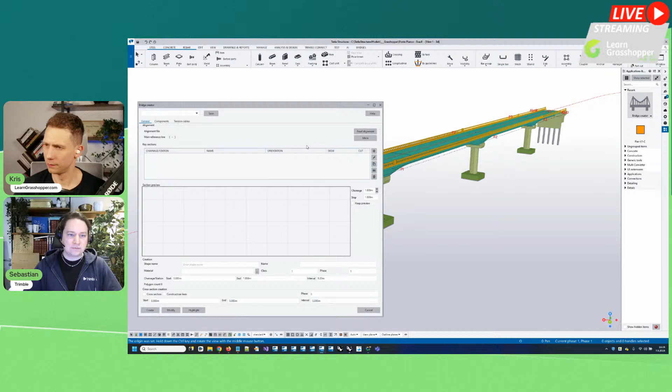Perfect. Yeah, thanks, Kris. So this is the case study we're going to do today. The bridge that you see on screen here has been created by Gabriel. It's based on a real location, on a point cloud scan, if I understood correctly. But the bridge is something that Gabriel then created using the Tekla Bridge Creator tool. So I'm just going to quickly pop up that tool on the screen in case you haven't seen it. This is not Grasshopper based. It's our own tool for creating bridges based on sections, and you can do quite complicated stuff with it. For example, this bridge was fully created with that tool.

And in this case, maybe it's not an overly complicated bridge. I don't want to say basic, but it's a normal bridge. It's straight and it's got some piers and so on. And a key point here, which Kris already mentioned, is that for Greg's part, when he starts with his drawing production, it doesn't matter how this bridge was created. In this case it was Bridge Creator, but you could have modeled it manually in Tekla, or maybe used IFC conversion to get in some reference models and build it that way. But of course, since this is a Grasshopper webinar, we want to show you how you can do something like this using Grasshopper. So that's the plan for the next section.

And just a quick question. As far as I know, Bridge Creator is available in Tekla already as a built-in tool in Tekla 2024. Am I right? Yeah, it should be included, and Gabriel might correct me if I'm wrong, but it should be included in the installation with the bridge role. Otherwise, it's probably on Tekla Warehouse.

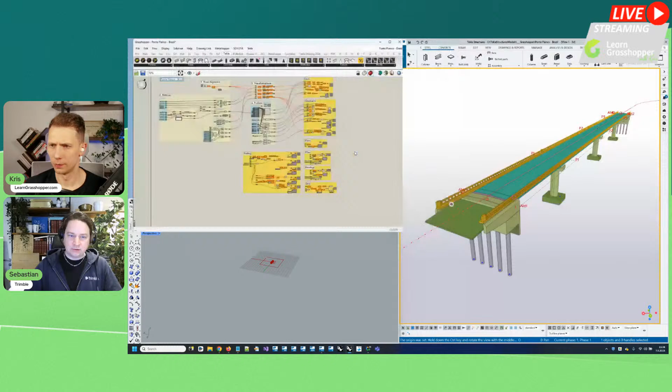But yeah, starting in Grasshopper, let me just see if I can get these windows a bit bigger. So this is the definition that will ultimately generate our bridge. And we have a couple of key parts here. What we want to start with is to get the road alignment. This could be a curve we have in Rhino. It could come from a CAD file. Maybe it could come from an Excel file with coordinates that we then just interpolate through. In this case, we have a polyline in Tekla Structures, so we can just use this one here as our reference line. And then let's see what we got.

So just for someone who is seeing Grasshopper and Rhino for the first time, Rhino works a little bit like AutoCAD, so you can import DWG files as a normal import. So if you have your road line in DWG format, that's perfect, but as Sebastian mentioned, you can also use X, Y, and Z coordinates. And for Grasshopper, you have some plugins to import LandXML files, so it's also possible to import LandXML files. Yeah, that's a good point.

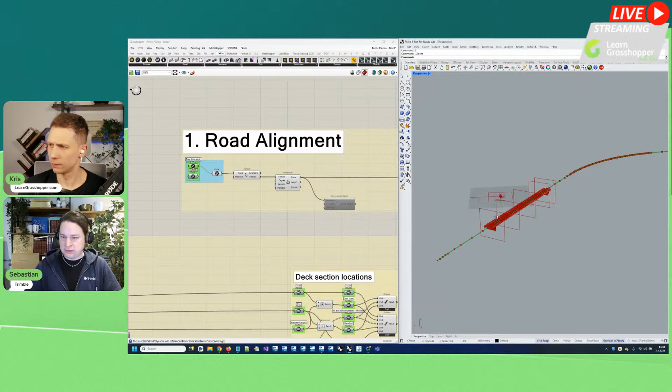In this case, however, we did get that polyline from Tekla Structures, and we see it here as the green curve. And we also get a preview of the bridge that the script generates. It doesn't yet create anything in Tekla Structures because I haven't activated those components. But anyway, once we have the road alignment, the next task is to define our stations, the interesting locations along the alignment, like where the bridge starts and where it ends, and so on, which we do here using just number sliders.

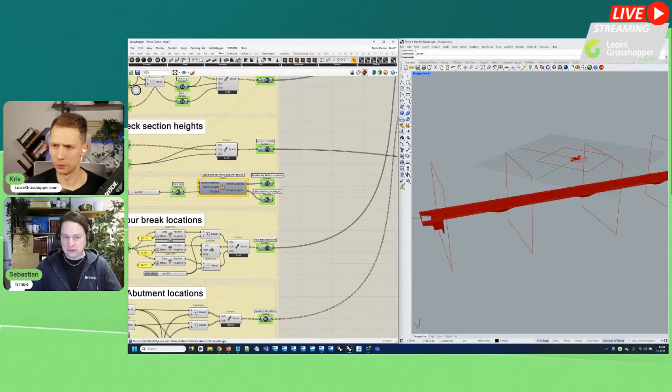They could as well come from somewhere else, of course, from your Excel sheets, for example. So we have the start, the end location, the location of the piers, the length of the abutment, and so on, as well as some stations here for the different parts of the abutments. And from all this, we just compile some lists of numbers. At this stage, it's just like the location along any road line. Where do we want certain things to appear?

Sorry to interrupt. Just one question: is there any thumb rule about the millimeters? Because I see that you are defining everything in millimeters. Is that a golden rule that we have in the Tekla Grasshopper world? Yeah, millimeters or meters work for bridges.

I like to use millimeters just because it makes it easier with profiles and stuff when you want to get really exact. Of course, for your stations, maybe you would like to define them in meters, and that's fine. Then you just use meters as units in Rhino and preferably in Tekla as well. But even if you have different units in Tekla and Rhino, they will still get converted the right way. So if we had meters in Rhino and this defined in meters, we can still have our Tekla models in millimeters. But for consistency, I'm just using millimeters for everything here.

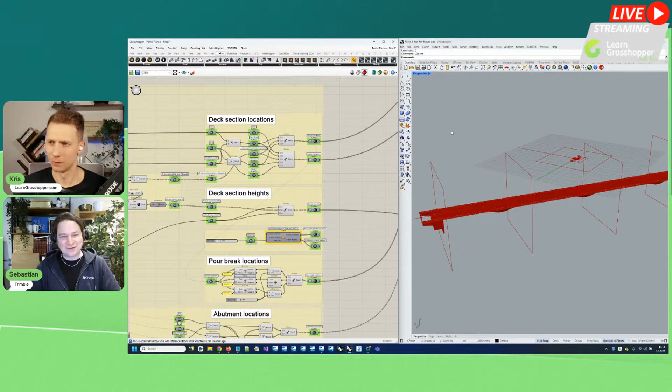And if you are based in North America, you can change that for inches and feet, right? Yeah, you can do inches and feet for stuff in Grasshopper. Then you just need to be aware that once you get to stuff like parametric Tekla profiles and certain types of offsets, right now they still need to be in millimeters from Grasshopper. And you'll quickly learn that if you use the wrong unit, everything gets scaled really interestingly. So you might need to do some custom scaling in Grasshopper before entering certain values, and that's something we're trying to think about workarounds for. But it's possible to use feet and inches as well.

Yeah, I think in Rhino 8 there are new components in Grasshopper to convert units. It's really simple to use. Yeah, this one, convert unit. So it's a source, and you can choose whatever kind of unit you have, and it's going to scale that. So maybe it can be helpful. Yeah, this would definitely be handy when you have something in inches and you need millimeters for Tekla. So that's a good tip.

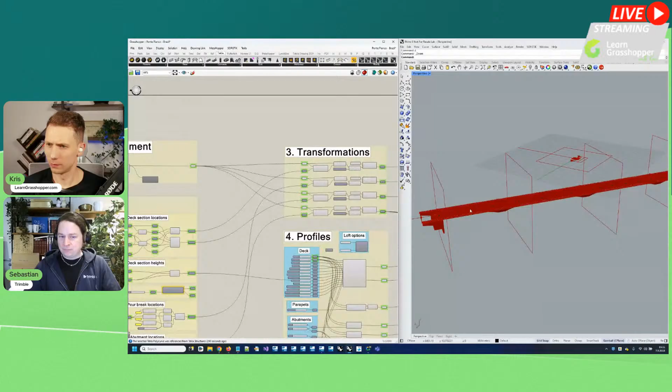So what we do then, because we have this list of numbers, we need to know where along the road line they appear, and for that we're doing these transformations. So it translates those numbers into actual frames along the road alignment. We have the start, some sections or frames for the abutments. Then we're adding some extra sections or frames at the support, because we want to be able to modify the depth of the profile at these frames.

And next, if we just continue the high level stuff, we will define a set of profiles. So this will be the profile of your bridge deck, but also the profiles for the different pieces of the abutment and so on. And they can be defined just here in the XY plane.

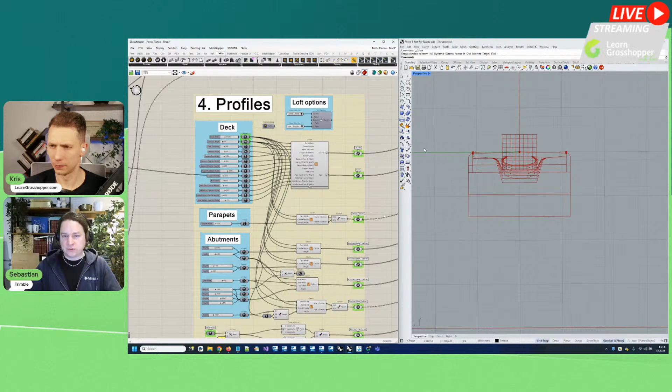Okay, but I think we have to explain a little bit more what we are seeing, because maybe for you it's easy to see the section, but I see lots of sections. So if you can just explain a little bit further what we are seeing on this plan. Yeah, I will go a bit more into detail about how it works in a minute. I think the point at this stage is just that we're defining in the XY plane all the different sections and profiles we want to use for the bridge. And I'll show them in a bit more detail in a moment.

But just the high level right now is that we have our sections, and we had all those frames along the road alignment. At this point, we haven't actually generated the bridge. This is what we have. And then we want to move those sections onto the alignment. So you see how we get them here for the deck, for example. And then we do a simple loft through everything, and we have something solid that we can start sending to Tekla Structures. And I'll show you that in a minute.

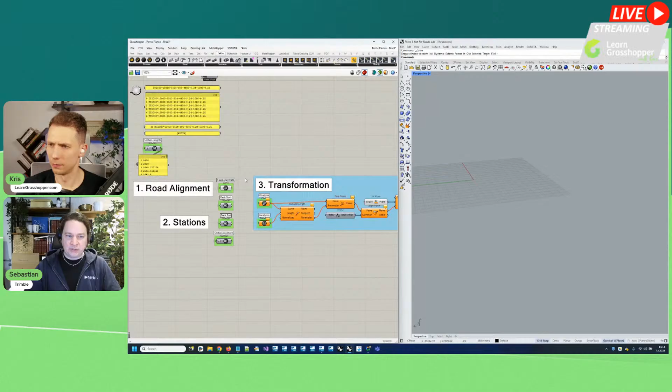But before that, let's take one example here for the deck to see how it works in a bit more detail. So going up here, we have again the road alignment.

That's the first step. In the second step, we were defining those stations, those numbers. So here we have the start mileage or chainage and the end. And then at the third stage, we had those transformations. So if we connect the start and end, you can see that here along the bridge deck, we will get the start of the deck where it should appear. And remember, this is just a preview underneath. So this is what we actually have at this point.

So until this stage, all these numbers can be also defined in the Excel spreadsheet. Like every bridge designer. Exactly. Yeah. So this doesn't need to come from within Grasshopper. You can link this to an Excel component, for example. And we can see the start frame there, and we have an end frame at the other end of the supposed deck.

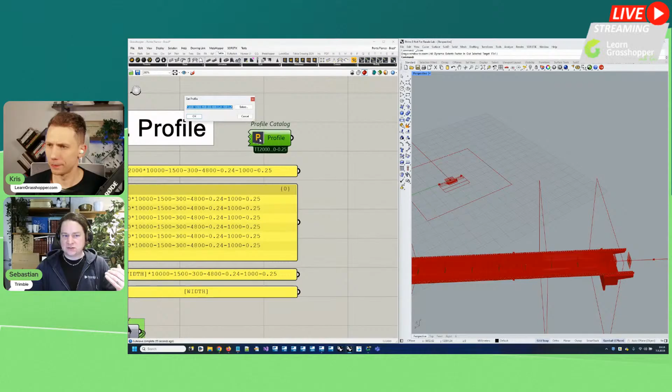And then we get to that fourth step about the profile. So before looking at the profiles we had further down in the script, we can just for this example use any profile from Tekla's profile catalog. So these are all the predefined profiles or your own parametric profiles that we have in Tekla Structures. And I went ahead and just found a double T profile here, which is parametric. This is the profile name that I extracted to a panel. And you can see here it's TT, and then we have these parameters.

The first one will be the depth of the profile or the height. Then we have the width, and then other parameters that define the shape of that double T profile. And if you want to see it in Rhino, we can use the profile contour component. And that will display it then here in the XY plane. So we see that's the section that we want to work with.

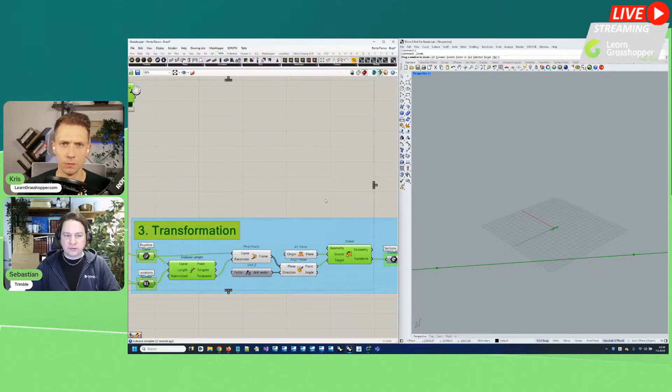And now we want to move this section to where we had those 2 points, those 2 frames along the road alignment. And we can do that with this orient component. So then you can see they appear here. So for those who don't know what orient does, actually it's moving and rotating the profile at the same time. So there is an orientation from one plane to another.

Yeah. And the source plane is the XY plane where we had that initial profile, and the target will then be calculated based on our road line and the location on that road line. And equivalently, we can do this in a slightly different way using the transform component. Then we use the transform output here and the input geometry. And this will actually produce exactly the same output.

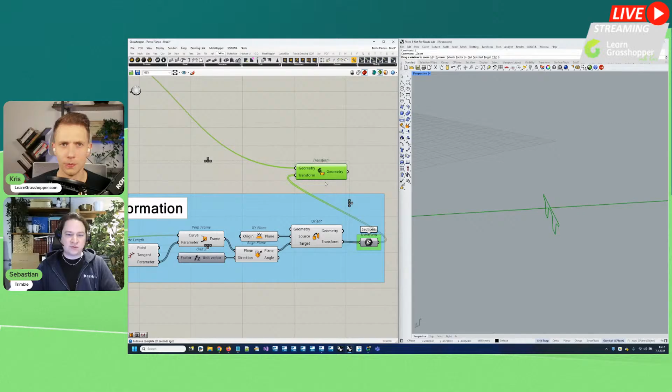But the reason I like to do it this way is that we can then reuse these transformations if we want to extrude the parapets or the railings or something else using those same stations. And it's much faster, right? Yeah, rather than doing this orient many times, you can just do it once and then use those transformations. There are some kind of transformation matrices underneath this that need to be calculated only once if you do it this way.

So the general workflow is always that you are generating all the cross sections near the 0 point on the XY plane, and then you are rotating that to the exact position. So everything starts from the zero coordinates. Yeah, that's what I find is the most convenient, because you'll see in a moment when we start defining the actual profile how it makes more sense to be near the origin rather than trying to imagine points in space.

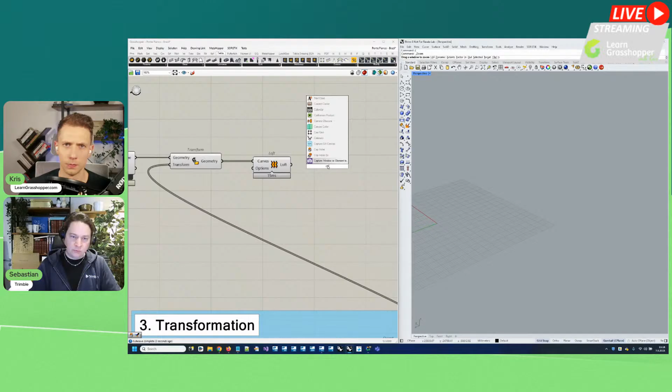So at this stage we have those two profiles aligned here, and then we just need to loft them together using the loft component, and we get that deck which we can make solid with the cap component. And at this point now we can try to bring it into Tekla Structures to see what it looks like over there. So just rearranging a bit again.

Let me turn on that, and we will bring it over as a Tekla item. So this is a kind of generic object type. It's just a polymesh, so it means that we can take any geometry from Rhino and just bring it over to Tekla as it is. So this is the first iteration of the bridge deck that we get in Tekla Structures.

So the next thing we want to do is look at the pile or pier locations. In Gabriel's model, we need to make it a bit thicker, and to do that we need to define more frames here at the bulge. We already did that in the station, calculating more locations, those extra frames, which translate into extra profiles. The deck itself didn't change anything yet, because we're just copying the same profile over and over.

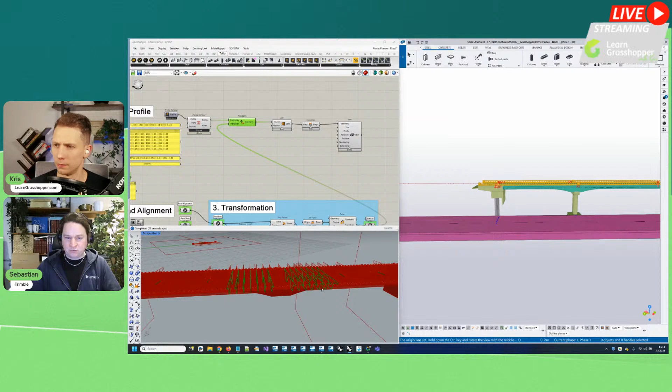But instead of using just this single profile, we can use this list of different profiles, meaning each profile can be individually defined in this list. They're parametric, so let's leave the first one as is, but start increasing the depth of the profile. In this list, we can change the numbers to increase the depth in the first parameter and see what happens.

Now you can see how it actually changed. We get higher profiles the farther we go, and you see we get that curvature down towards the first pier.

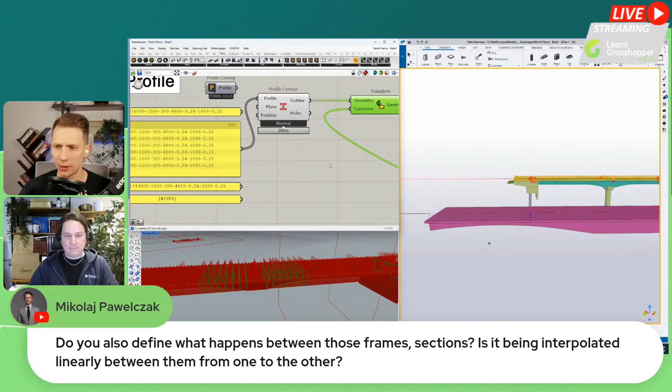And I think we have a good question from Mikolaj: do you also define what happens between those frame sections? Is it being interpolated linearly between them, from one to another?

Yeah, you can choose the interpolation type here in the lofting options. We can set it to normal, which is a smooth interpolation, or straight, which is actually preferable in this case. I can change it already here, because then we get the straight deck, and only once we start changing the profile will it then change.

The reason it's better to use straight here is that if we want to make it smoother, we can instead increase the number of sections just with a parameter. In Tekla, it will always be interpolated anyway with a straight interpolation. If you have something smooth in Rhino, internally in Tekla it will be represented as a straight polymesh. Even though you don't see it in the model, internally Tekla doesn't work with actual mathematical curves - it will always be some kind of interpolation.

So we might as well take control of it over here and just set the number of sections we'll have to get as smooth a transition as we want. But anyway, good answer - so definitely increasing the number of sections will help increase the quality if this is a curve, just to make the interpolation better.

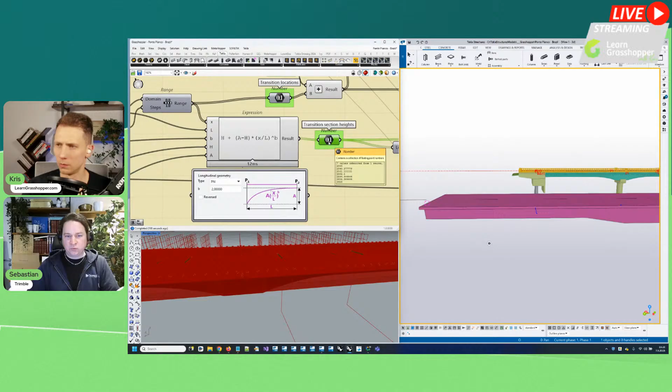So that's what we've done here, and the output will be just this desired depth at each of the sections that you saw previously. That's again a list of heights, a list of numbers, and we can then bring those numbers in here. You see here is the same list, and now we'd like to use those values instead of my manual values in this profile string.

To do that, I'm going to use the replace text component, and the input will be the profile string. Here you can see I changed the first parameter to a tag that says 'width' - I could use any name, it just needs to be something I can search for and replace with my actual values.

So that's what I'm doing here - we're replacing the width with the list of values here, and the output will then be a new list of profiles. Now you can see my actual heights are being inserted here in the list, and those get applied to each and every section. Now we start to get the actual bulge that we're looking for here.

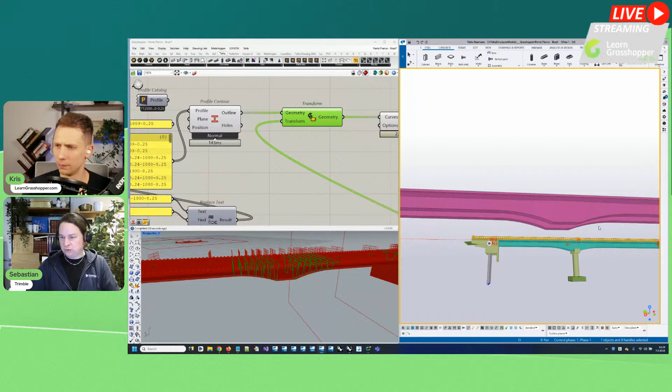So now I'll remove this one and go to our actual bridge deck - let's get rid of that. You saw that I used a profile from Tekla Structures. Like I said, you can sketch your own profile, but here I decided we're going to try to use a profile that's made entirely in Grasshopper instead.

So if I just look at one section, you can see that this cluster here will generate the green outline that we have. And of course, being parametric, we can change the values and get different kinds of sections.

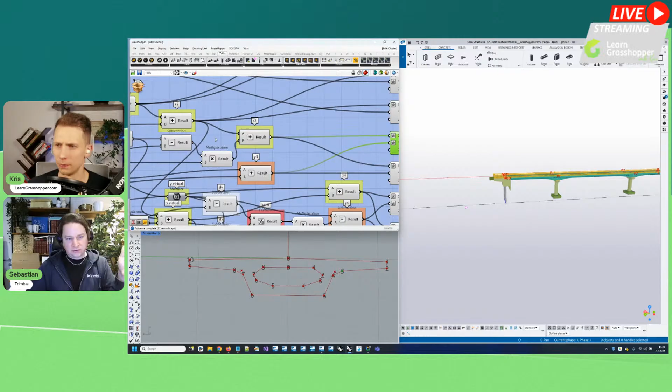I'll quickly show what it looks like inside. This looks a bit messy at first because of all the wires, but it really boils down to simple things. We have all those inputs - width, thickness, and so on - then do some simple arithmetic to calculate each coordinate for the points. For example, to get the third point, we calculate the x and y coordinate, all based on those inputs for deck thickness and width. That way we generate every point and collect them in order, and at the end we get out the polyline around the section.

So that's what's happening here. Because we had more than one height we want to work with, we can insert that as a list - the same list we saw previously. But now it works on this cluster, and we can see all these profiles being generated on top of each other, so the output will be a list of different profiles. Only the height is different - one parameter - the rest of the parameters are the same. The rest works the same at this stage. You can modify other parameters as well, of course, in the same way.

There's some interactivity between the width of the support and the height of the support, so it does something else inside the cluster. Depending on your situation, you might want to do the calculations before, or you can do it inside. I won't go into detail, but this will affect the width of the actual support as the height increases.

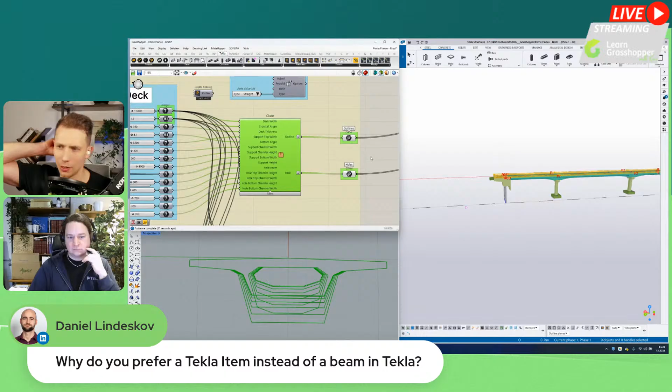Just one question - Daniel asks why do you prefer a Tekla item instead of beam in Tekla? Maybe this is - I think you have added variable cross sections in the newest version, so maybe you can tell more about that.

Yeah, there are variable cross sections with, I think, up to 10 different cross sections in the API at least, and that's supported by Grasshopper. But in this example, when we want this smooth transition, let me actually generate the bridge deck so we can see what it will look like in Tekla. We are taking all those profiles like we saw here, placing them in the correct locations, and then lofting between them as in the previous example. In the end, we can generate this item in Tekla.

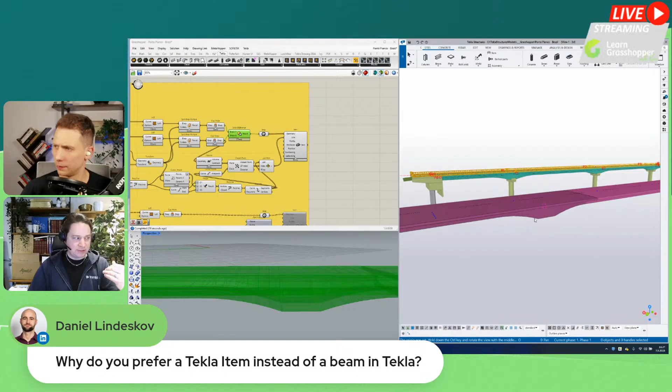The reason why we prefer to create this as an item is mostly about that variable cross section, which you might be able to replicate with certain variable cross section beam profiles. But if you have a lot of different sections, you will run into some kind of limit. The second thing is that as soon as this starts to get curved - like now it's straight, but if it was over here, and especially if it's double curved - there's no way to control the crossfall at the far end of that polybeam. You can set the rotation at the start, but the end will be whatever it is based on whatever algorithm Tekla uses internally. So this way, by defining lots of cross sections and lofting between them, we always know at every point exactly what the crossfall is. That's one other reason for using items.

We also have a comment from Gabriel - whenever you have curved clothoids or super elevation, the item is the way to go. If you have a simple bridge deck, beam will be good enough. Especially since you can also have some variable cross section, but in the other cases, the deck item will be the best solution.

But we'll get back into the discussion about items versus beams in a moment. First, I'm just going to show that we're doing the parapets in the same way. Here we start at different stations and use a different section, but otherwise it's exactly the same idea.

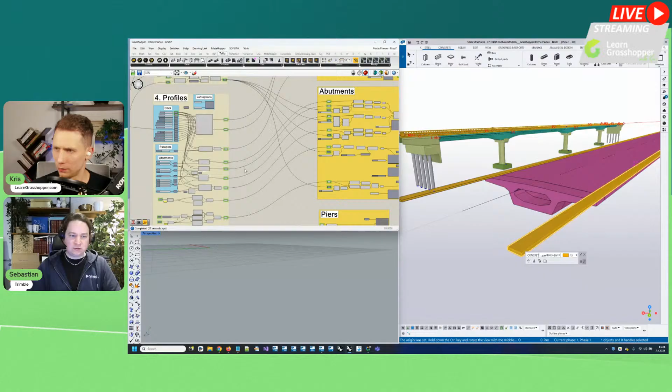Actually the same will go for the abutments. Looking here at the abutments, let's compare it to Tekla. Even though this looks more complicated, they can actually be created easily as just extrusions as well. This side, for example, has the same section as over there - it's just a bit higher. So it's very similar to what we're doing with the bridge deck in that sense.

Again, we are just defining a set of profiles that we want to extrude through these stations, and now the stations are a bit different - we're focusing on the start and end of the bridge rather than the middle. That way we can generate all the geometry for the abutments. Let me just enable them so we can see them in Tekla Structures as well.

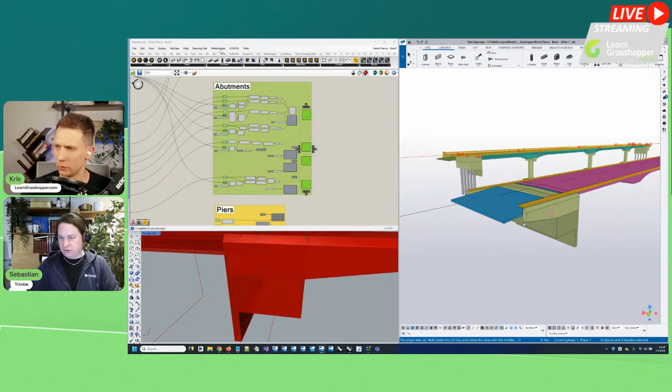And that will be your abutments. But even here we are doing some things like this: for example, it's created as a concrete beam with a profile. So whenever you can, it's good to use beams.

That will be even more evident in the next part where we focus on the railing. If you can generate the railings, we have just 2 minutes left, we have to move on. So generate railings and show how they're created, using the same methodology - are you using items? It's different, because here we are using beams.

The reason for that is we identify the edges of the deck, and then we use beams with a profile rather than creating them as items. The reason is because we have, for example, these middle pieces here - there are hundreds of them. If we made them as items, which might be easier, just boxes from Rhino, the model would still perform okay, but the issue is with modifying and generating them through the API, which can become really slow. So instead we prefer to create these beams with a rectangular profile, offset and controlled by Grasshopper. They are actual beam objects, which are a lot faster than items. So a combination is good.

Now I'll quickly show the third way of inserting objects in this example, and for that we're going to look at the piers. Here, Gabriel has instead of creating these objects individually, compiled a custom component to do it. A custom component in Tekla is just a collection of simple or complex objects that have some relation to each other and can have some logic - parametric intelligent groups of objects.

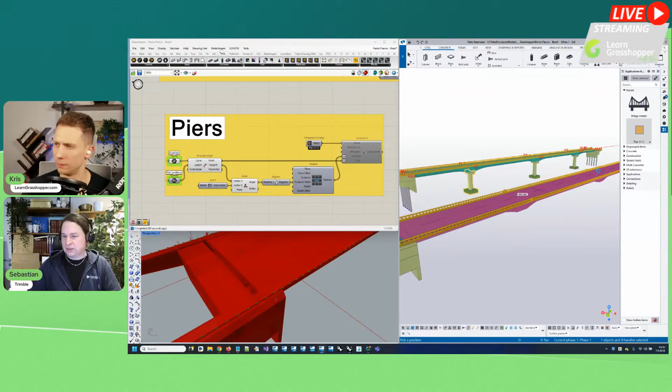So for example, here we have slabs that have been extruded using the profile thickness. Gabriel has grouped them together into this intelligent component, and we have that available in Tekla for insertion manually. I could just click it here and select wherever I want to place it, and Tekla will then place those objects relative to my location.

We then need to rotate them to match the bridge, and doing that from Grasshopper is straightforward. We calculate the points where we want to insert them, then tell Grasshopper the name of the component we want to use, matching what we had in Tekla. At those points it can then insert those piers, with good position and rotation. It calculates the rotation based on the tangent of the road alignment and sets that as an attribute for the component - the same way we'd do it manually in Tekla, but now automated.

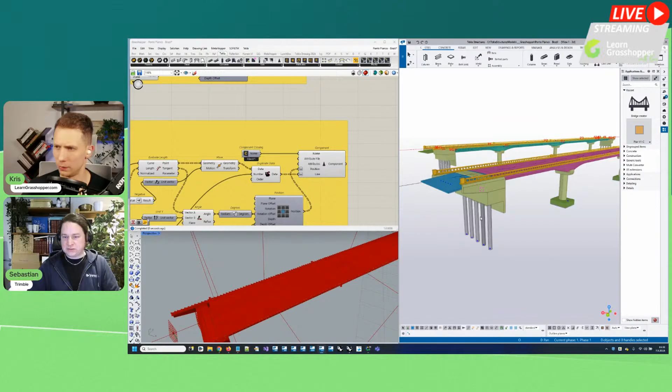That same idea goes for the piles as well - these are also custom components. This is a good use of components because we can make them quite complicated. Just looking inside this, we can see Gabriel has added some reinforcement into them and some logic, then saved everything as a single custom component. We use Grasshopper to place it 5 times, or 100 times, or 1,000 times. That's a good combination of the power of Tekla with the power of Grasshopper, because doing all this manually in Grasshopper is possible but requires a lot of coding. It might be quicker to reinforce it using the tools in Tekla and then copy that around using Grasshopper.

To finish up, now that I know all my locations - these, by the way, were the bearings underneath, same idea as the piles - I know all those locations, I know my piers, so I can generate a grid. Once that's done, we have something very similar to what Gabriel did using Bridge Creator.

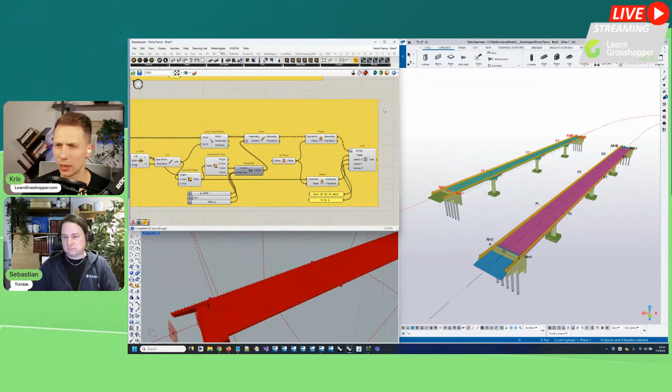Even in Bridge Creator, we have items, right? So is this the same output we're getting? Yes, exactly, I used the same object type. In Bridge Creator these are also items, but this is a beam, so you'll have the same object types in this example as what Bridge Creator produced. We'll share this script so you can try it yourself. What about the components - will users have this component, or for columns? Maybe that's true, so maybe we have to attach them.

We can share Gabriel's model perhaps, or then attach just the components, export them, but they will be needed, because the only thing Grasshopper looks for are these names. So if it's a standard Tekla component available out of the box, then it will work like in any Tekla model. But if they have been made specific for a project and are available only in a single model, then we need to share them.

Yeah, Gabriel, can you hear us? Yes, I can. Perfect. You are with us. Can we share this component with users? Yes, we can. I'll compile everything. I'll share the component.

Perfect. Thank you, Sebastian, for this amazing script. It's really great to see that the same workflow can be used for the bridge and also abutment. I think sometimes it can be like this switch. It's like, okay, this is the same methodology that can be used also for retaining walls, not only bridges. Everything that is going aligned with the road curve.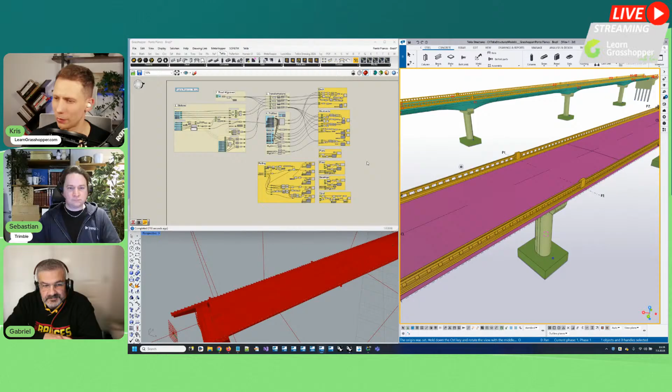Okay. Let's go to the second part. Thank you, Sebastian. Sebastian's going to come back to the Q&A session that we are going to have. But now let's go and talk about the second part. Now we have this 3D model. Everything great, but at the end we have to produce drawings, right? Maybe Norway is so lucky that they don't have to produce the mass of drawings, but in the rest of the world, we still have to produce drawings.

So Gabriel, if you can just make an introduction to all the properties and settings we are having, a little bit of the different types of drawings, before we jump into creating drawings with Grasshopper, which Greg is going to present in a while. So Gabriel, just make the introduction to the world of drawings. Yeah, thanks, Kris, and I will.

And I can tell you that there are model-based projects that are not relying on 2D traditional drawings any longer, just based on models, or with a couple of drawings like in Finland. So Norway, they're going all in, but it's happening too in the USA, right? There are some Departments of Transportation in the US that are looking into the models and trying to build based on the models. They still have some growing pains, but they will get there. So maybe we are not aiming for what Norway is doing, no drawings at all, but can we optimize the drawings and reduce the number of drawings to deliver our projects?

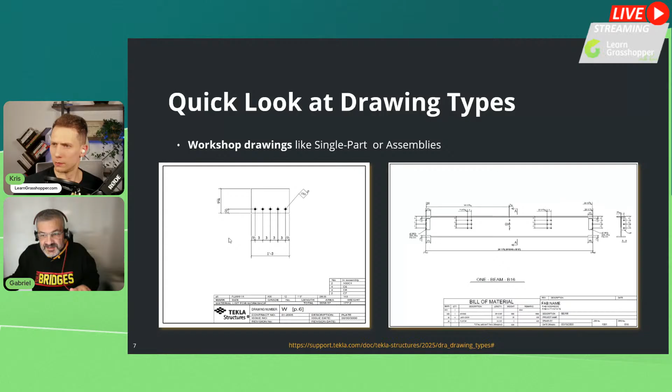Workshop drawings, single part on the left-hand side. Tekla has an amazing capability to create automatic drawings like this, and our steel fabricator clients take advantage of it. On the right-hand side, we have assembly drawings. Then we have cast unit drawings. A cast unit drawing is a concrete.

Gabriel, sorry, we have some troubles with your voice. If you can just speak slower. Slower, I think you're right. You're speaking too fast. We have time for your presentation. Okay. Maybe some troubles with the internet, but just keep going, a bit slower, so it will be good. Yeah, I think I'm too eager to see what Greg has to show. So I'll slow down a little bit.

Our cast unit drawings can be cast in place or precast. We have rebar, and this intelligent drawing can be the drawing itself or the bar bending schedule, or both. It's great, for instance, to take advantage of the cloning capability of Tekla Structures, because if you have this type of beam, any similar beam you can clone. The first drawing can take a while to produce, and then all the other ones take just a couple of minutes, and you can clone those drawings.

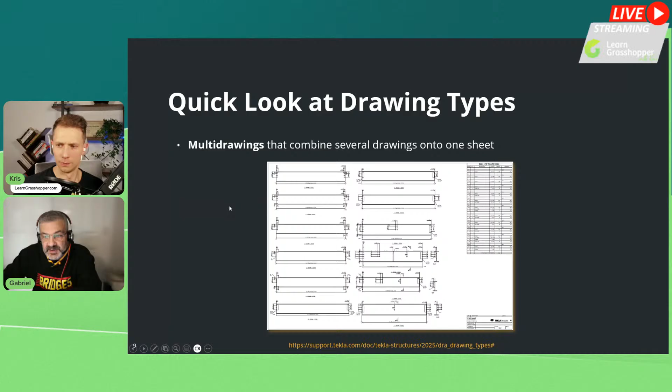The last type of drawing that I have to present is the multi-drawing. As the name says, you can see here n assemblies in the same drawing. If you place a table with a bill of quantities inside this drawing, everything inside this drawing is going to appear in that bill of quantities. Quite handy. So you produce your assembly drawings separately, then you join them into one multi-drawing, and you can even add the bill of material.

So, 3 levels of control. This is very important and takes me back to when I learned Tekla Structures in Helsinki, that I really needed to understand, before I even started doing drawings, these 3 levels of control: drawing level, view level, and object level. And I'm going to repeat this a couple of times. If you don't know Tekla, or if you don't produce drawings, you need to understand this, because when you go to Grasshopper to produce your drawings controlled by Grasshopper, you need to know. And I guess Greg is feeding the script some information about the drawing level and view level, and probably not object level.

At the drawing level, you can control your frame and all the types of views you want and the settings of those views. Then the view level controls the look of the objects, maybe the filter and all those settings. And the object level is when you go inside the view and you have a line from a beam, for instance, and you have all that information there. You try to control from 1 and 2, and just a couple of times number 3, but you should avoid changing object level settings. And I'm going to tell you why in the next slide.

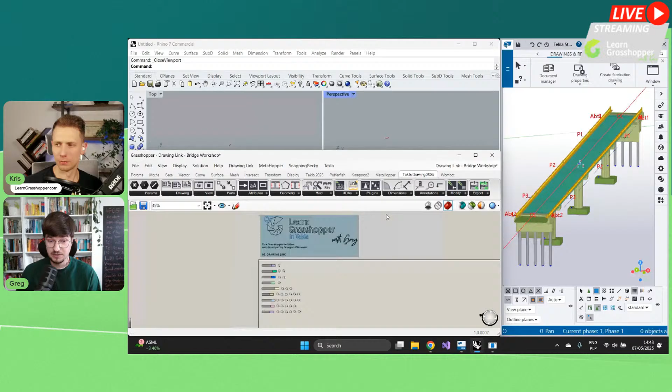And as you said, Kris, previously, it doesn't matter if the geometry is coming from Grasshopper, from Bridge Creator, or was just modeled by some crazy guy by hand. The drawing link works when it starts from Tekla. This is the only necessity. So we have the same model Gabriel prepared, and with that script I will try to go through all of those little blocks and explain exactly what is happening.

And the first thing when you want to create a GA drawing is to understand what scope, what range of the model I want to present. And here it's quite simple because we want to present exactly that bridge, and we have one model with one bridge. So I already selected all of the parts in that model. We can always use Sebastian's Tekla object pipeline to get them in a different fashion.

But I just selected them, and before creating the GA drawing, it's always good to get some restriction boxes, some bounding box of those objects. That component is coming from the live link. Because when you create the drawing, it's not only about operating with the Tekla drawing link part. All of those workflows heavily rely on what Sebastian already developed inside of the live link.

So to successfully make your drawing with the help of Grasshopper, you will combine the superpowers of both of those links. But okay, now I have those bounding boxes, and those are just very simple geometries, just some boxes. As you can see, for those piles, for example, in Tekla they were rounded, as Sebastian showed already, but here they are just some squares. And this is due to performance, since we don't need exactly detailed meshes for those objects.

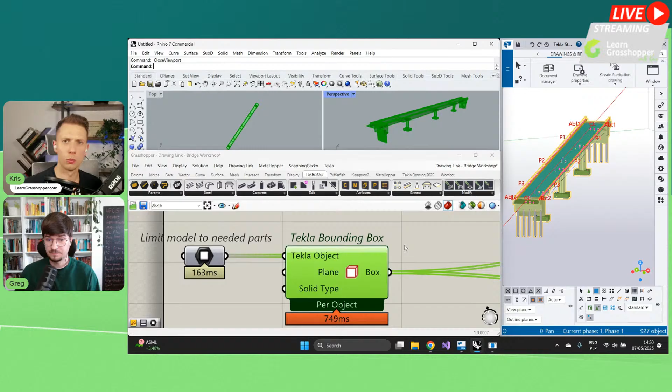So we have limited the model, but then we should think, okay, from which side I want to see, what kind of view I want to create on the GA side. Here there could be different starting points, but I just started with something quite simple. I just asked the user, hey, please pick the line. The line is presented as a blue one. It's just the line along the longitudinal axis. That's all. And those two pieces of information are enough to construct the view plane.

So that will be the first thing which we want to enable, because here we will just create the plane, which will be our source of how we will see our drawing. Now it is probably not very visible, but we will just create the elevation view. So we need to think what kind of projection we should apply to get our result. That will be the elevation view. We just want to look at our bridge from the side.

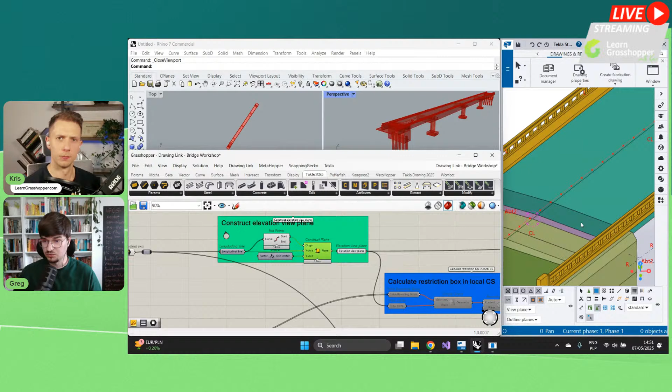That's the first task. Then when we have the restriction box in the global coordinate system and we know from which angle we want to see our bridge, it's a matter of applying the transformation. To do that, in the drawing link, there is the simple orient component. This is just a variant of the orient already presented by Sebastian, but a little simplified. So here we are getting our geometry of those elements, but already projected, transformed to look only at the elevation view.

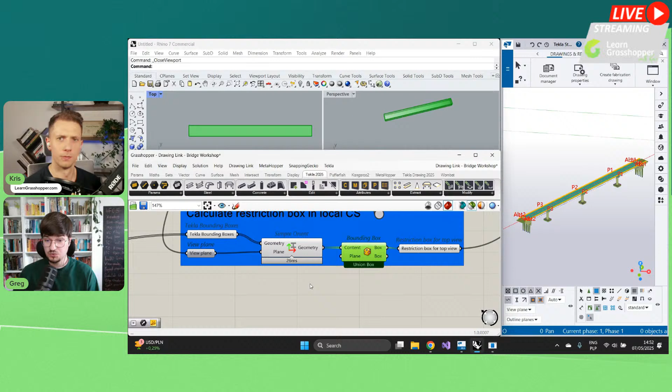And that is the main view which you will use inside of Rhino, because almost all of your drawings will be oriented in such a way that you look only at the top one. So we already know the restriction box, how big a portion of the model, and which coordinate system we will use to create the drawing. So maybe that's a good time to just create the drawing.

To do that, as already said by Gabriel, we need to use some kind of settings. Here I will use just the standard ones, and those are the first object settings for the drawing. So let's create the drawing. There is just one flag, and now the drawing will be created and opened. It's just a dummy drawing without anything, but we already have set up the name and the layout. This comes from those settings which are saved before creation. So we have the drawing, we have the view.

So now it's time to create the elevation view. I want to create it in a round, because at first you need to mimic the model view. As every time when you are dealing with GA drawings in Tekla, you first have to create some kind of view inside the 3D space. Here it goes the same. You have to use some name and mainly describe from which angle you want to see and how big a portion of the model it has to use. Then it's time to use some settings for the view, and then let's just create that view.

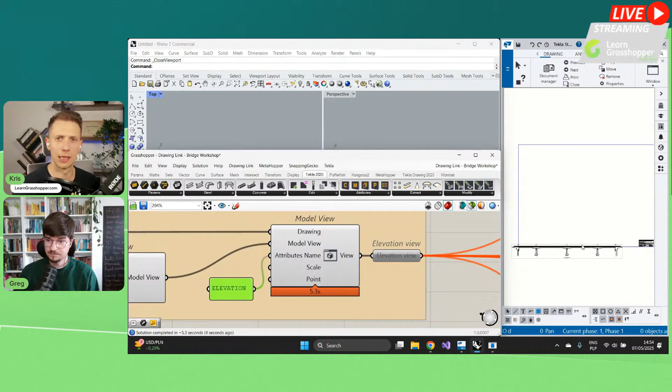So now the view. Sorry, just to interrupt. So what you are showing is almost exactly the same workflow you have when creating it manually. Exactly. You also rotate the view into the angle you would like, or you create some view based on the axis. And then when you are creating the GA view, you are selecting, hey, Tekla, please get exactly that angle, that restriction box, into the drawing area. So that happened between those two components.

And now we have the elevation view, just the elevation view, nothing fancy. But it will be the base for showing the next capabilities of the live link, because now I want to place some dimensions.

And I thought about that one. So that will be about the foundation. So every time when you have some drawing, you are able to get elements which are visible on that particular drawing. So I will just use those two components. Let's go here. And now I have asked Tekla, hey Tekla, I have some drawing view and I'm curious what I see there, what is there.

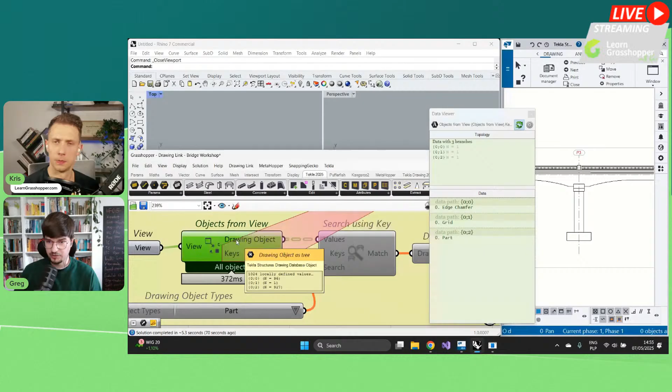So there is the component coming from the drawing link, which will return you the result in the form of a key value pair. So it says that, okay, on the drawing you have some edge chamfers. They are not so significant for us. You see some grid and you also see some part. And if you go into that part, then you will see that in the third branch, we are getting quite a lot of different elements. And as you saw here, that reflects the part. So then with the help of those two components, you are able to get only those parts. If you're interested in the grid, then you are just getting the grid.

That's the result. So that combination of those three components is very frequently used in terms of the drawing, because you have to always ask, okay, so what do I exactly see on the view? And maybe if you are following what Sebastian showed for the creation of the whole parametric stuff, then you know what type of objects to expect in which place. But rather you will work just cut from that modeling part. You will start with Tekla, and then you have to query to filter those things.

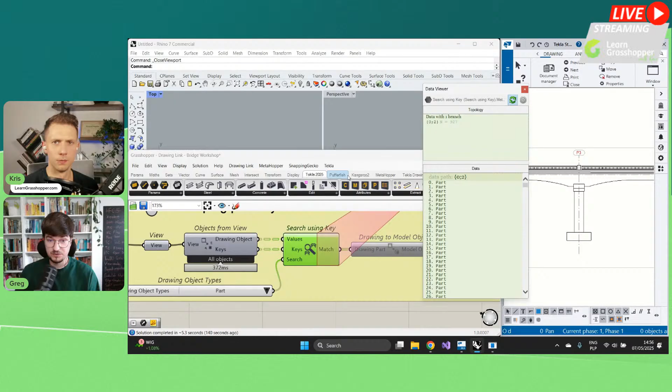So here I'm getting some drawing parts, and you can also always look into them by just selecting them. So now I am getting just those. Oops, sorry. It selected all of them, and it took a significant time just selecting them in the view. So maybe it was not the best idea. So let's just wait. Okay, and those are the drawing parts.

And now I want to group those elements, because they are now just the drawing elements. You can change their color, what is visible, so you can tweak their object level settings as Gabriel presented in the top down. And it can be done with the help of the drawing link, but as Gabriel said, it is not the best way to do it. You should always try to say how the drawing should look based on the view settings, not the individual elements. Okay, and then I am just going from the drawing part to the model part, and on those model parts I am able to group them based on many different features.

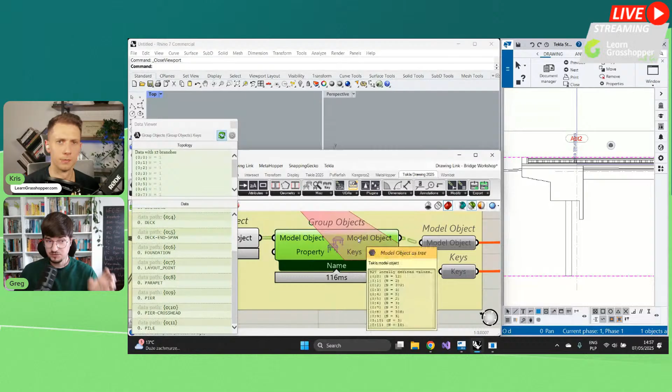So now I will say, hey, you have a list of Tekla objects, and I want to have them grouped by the name. And what does it mean, group by the name? So here under the hood, that component asked every model object, hey Beam, what is your name? Okay, my name is abutment, my name is bearing, my name is something, and it grouped it into this key value dictionary. So here we are getting all of those elements grouped by name. Maybe in your case you need to group them by the class. So now they are grouped by classes.

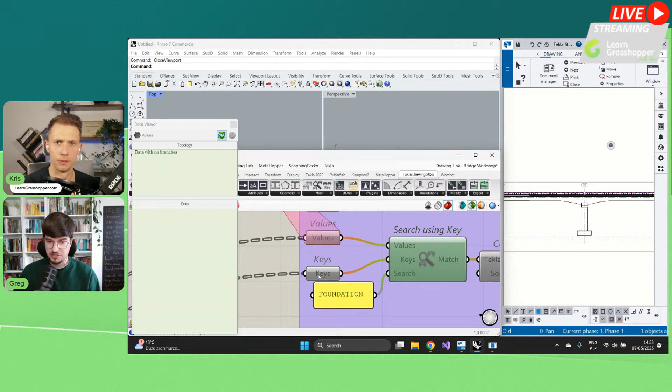Maybe you need to use some report property, then you have to provide that report as an input for that component, and you will get the same result as with the grouping by the name. And very often, before placing some level marks or dimensions, you need to group those objects. You need to filter them by some distinguishing factors. So I will now go further, because now I have them grouped by the name, and I want to operate only on the name of the foundation. So now I will say, okay, I have all of those elements which are visible on that view, but I need just foundations. So let's go to find only the foundations.

And at the beginning, we had a list of a lot of different objects. There were 12 branches, over 900 different elements. But at the end, we just get 3 of them. And as you remember from Sebastian, there are 3 foundations. So we have just...

Let me know. Just so I'm following. So before, you search for the parts, right? Before, in the previous step. Here I asked the view. Yeah, for the part. Yeah, and then search the key for the part. Exactly. Yeah. I get all of those elements from the view.

I converted them to the model objects, and then by my modeling techniques, maybe using the class system, maybe name system, maybe some UDA system, we are grouping them to work on small chunks. Because if you would like to dimension 900 elements at once, it would be very hard to distinguish, okay, this needs a dimension from the left, this from the right, this from the top. But here you can just decrease the complexity of the task.

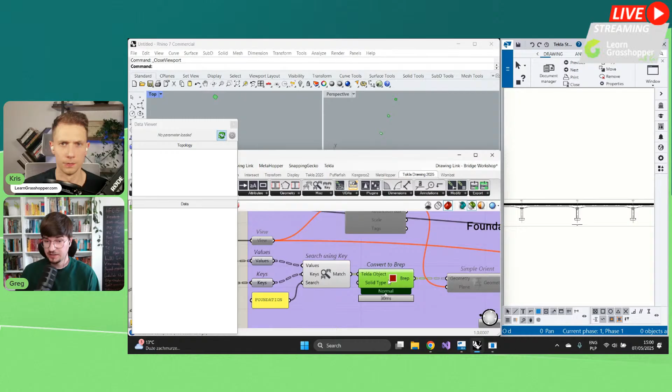So I'm getting only the foundations, and then the magic starts, because I have the foundation, those 3 model objects. With the help of the live link, I am able to get the BREP, and those BREPs are referred in the global coordination system, because I am asking the model object. So every time you work with the drawing, you need to do the transformation from the global coordination system to the view coordination system. And that's the crucial part of every drawing operation.

Because here in the drawing, if you would like to insert something, I will try to insert, whatever, then you see that I now get this red arrow pointing to the view X and Y. And those directions don't refer to the global ones. They are very specific, very unique for that particular view. And every time you place something in that view, you have to refer to its internal coordination system. To do that, you are just asking for the view properties: please tell me, what is the display coordination system?

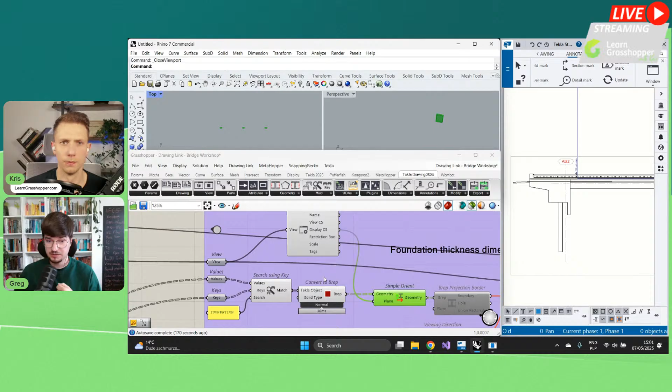And you use that for orientation of your 3D geometry into that 2D one. So now please look on the top side. We had the 3D BReps in the global, but now we are getting just their projection, exactly the same as within Tekla. So those three ones, I will now just get it. They are exactly those three elements in the same direction, in the same coordination system. Oh sorry, I just changed it. I close it, not, let's zoom, and here they are. Okay, so but those are still the 3D geometries.

So the next thing to create the dimension is to get the shadow of them, to cast some light and get the edges which are visible from the top. So to do that, you are using the B-rep projection border, and here you see the difference in Rhino. I had the 3D object, and now I just get the polyline which surrounds that.

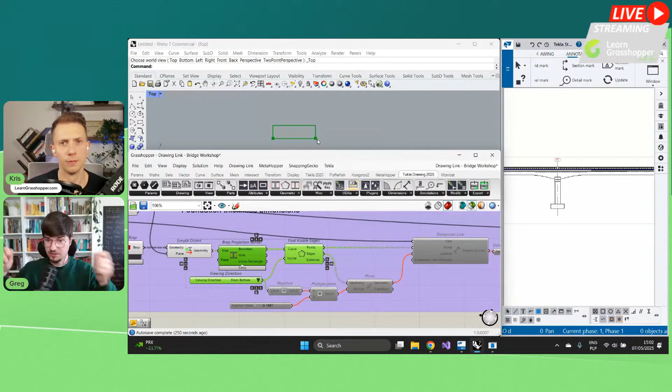And then the fun part starts, because you have to consider, okay, so from which side I want to create the dimension. And to do that, I will now just say, okay, I had that geometry, I want to get it from left, or maybe from right, or maybe from bottom, you get the point. So you have to decide from which side you want to create the dimension, I will use it from the bottom. So now those little points, they are the dimension points which you will use inside of Tekla. So we are almost ready to create the dimension line.

And we still miss just one thing, because we need to specify where exactly the dimension line should be placed. Because now we know that it should be anchored, associated with the points from the foundation, but we have to find some way to get the free space. And there are a lot of different ideas how to do it, and it all depends on your use case. For that, I know that there won't be any object around the foundation, so I will use just that edge to be moved a little.

So now I will enable those components, and you will see that the dimension is created and it's moved based on that setting. So I am getting it in that way, maybe from the right side, maybe from the left, and that's all about the dimensions.

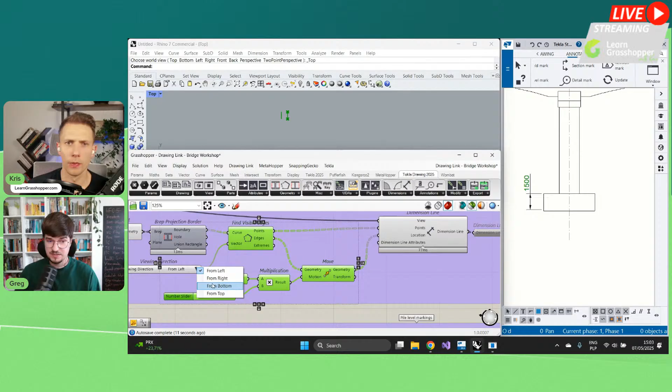So what input are necessary for creating the dimension, if you can repeat? And if you can zoom a little bit more to the component.

Yeah, so you need the view, which we are creating. You need the points. And I assume, as you can see, it's a data tree, so you are creating three different dimensions. Yeah, exactly, those three dimensions are created at once during the one step over that component, so it was run just once.

And location, the last one, is always when you are doing that manually - you have to choose first point, second point, and then the middle mouse button, and where you are positioning. Exactly, this is very, very similar to the way how you do it just by hand. So if I will place the dimension, I will pick a point, and say exactly where.

As you said, with the middle mouse button, I am just saying, okay, here I want to have the dimension. So it's not too scary for all the users seeing that you mimic all the same steps that you are doing manually.

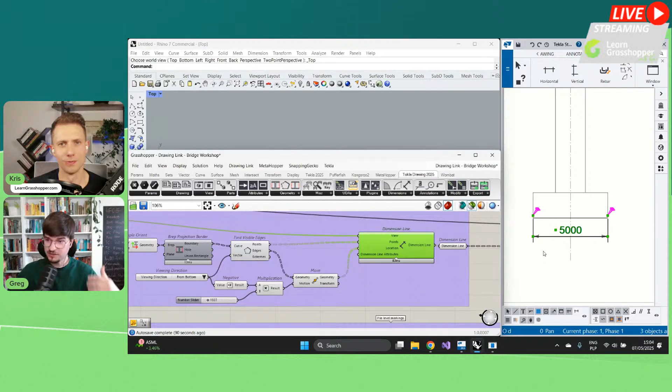Because they need to have control over the dimension line, you need to show which points to pick and where the dimension line should be placed. Here I'm placing one dimension line per foundation, but in other types of drawings there will be multiple of them, and you don't want to create clutter or have them in one messy space. That's why you have control over the placement location.

So before doing the drawing, you need to have some imagination of how exactly it should look. That's always the tricky part. And that was about the thickness.

But here are the grid dimensions, and they are a little more complicated because we have some grid. I will start exactly the same as previously, so I will ask, hey view, please tell me what is visible, what is there? And I am getting, as previously, different elements.

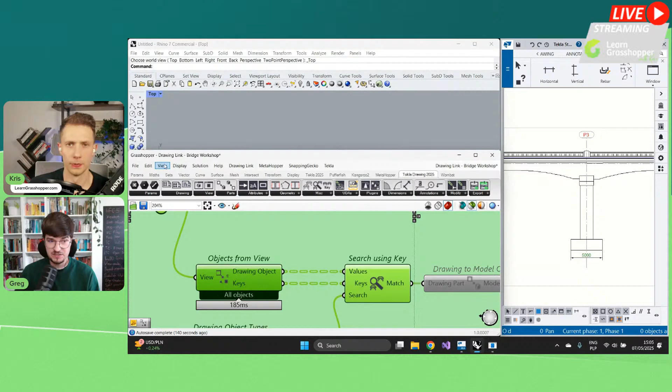And now in the keys, as you remember previously there was no dimension. This is the same view, the elevation view. So now something new has happened, but we will work with the grid, and as always, I am limiting the scope of that result only to the grids.

Then I am going, okay, please go to the model object. And with the help of the drawing link, I am asking about the drawing, about the grid, what surfaces are there, what are the labels, what is all of that stuff which is related to the grid in Tekla.

And for that, I will just try to go to the perspective. Okay, so now this is the representation of my grid, the surfaces which are related to that one. And I want, as always, to see them, but not in the global coordinate system, because that's not what I want, but to see them in my view coordination system.

So now that's what I see in the view. I see this P3, abutment 2, all of those are represented here. So let's go to the top one, and that will be what I see. Of course it's a little different representation, but you get the point that those vertical axes are reflected by vertical lines.

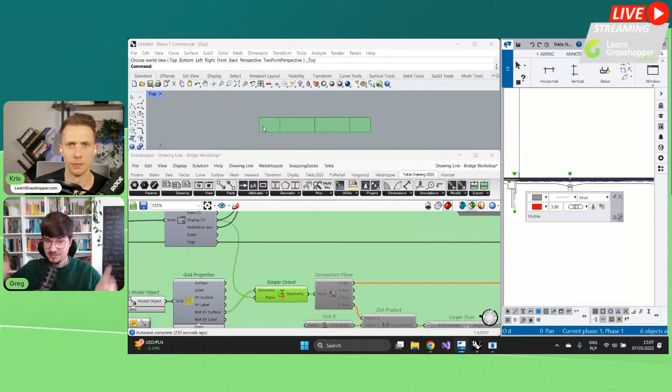So with the help of the power of Grasshopper, with Rhino, we should somehow get those vertical plane axes from all of those planes, and it can be done just by some dot product of those. So I will just enable a few components just before the dimension line to make it a little faster.

So you see that now I am getting some points, and those are coming from that one. So here are my points which I want to dimension, and I want to place the dimension line in Tekla. This is the component which is responsible for creating the dimension line. And now I provided just one location and one branch of those points, so in the result, I just get one single dimension line for all of those distances between.

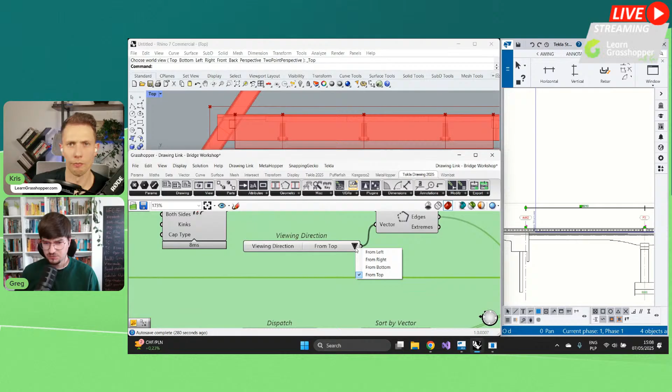And as always, we can think, okay, should I see that from the top or maybe from the bottom? And here, what is a little different than in the previous case is how to get the bounding box, how to find the perfect spot for our dimension. Because previously I was only considering the foundation, but here with the axis, it's not so easy what we should do.

So I am using this magenta restriction box, and with the view properties, you can always see what part of the 3D space I am seeing in that view, and you can project that. So now that's what I see - this is the pink rectangle coming in Tekla.

And okay, so this is the pink rectangle, and I want to have it a little bigger, so I want to create some offset. Then I will just ask, based on that offset, what points are visible from the bottom, from top, whatever is your idea for placement. And I am creating the dimension line.

And for the dimension line, as Gabriel said, there are 3 levels of settings. And now I provided also this extra dimension line attributes, which is used for specifying settings different than the standard. So I will now create something red.

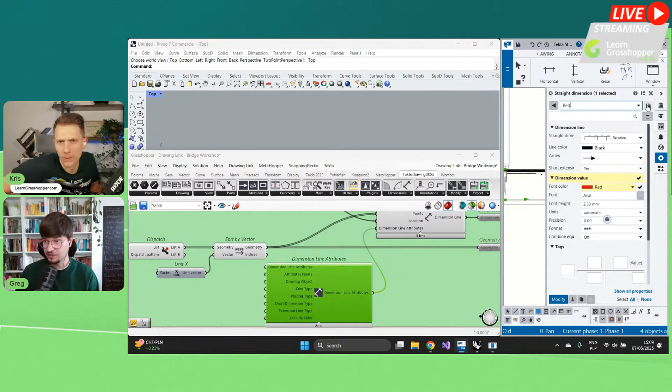I will save it as a red one. Now I'm creating in the model directory the red settings for the dimension line. Of course, it doesn't change yet. But if I use the same settings, I'm telling Tekla, please create the dimension line with those attributes. Then I get those settings applied, so now the color has changed. If I don't provide anything, the standard one will be used. So that's about providing the attributes.

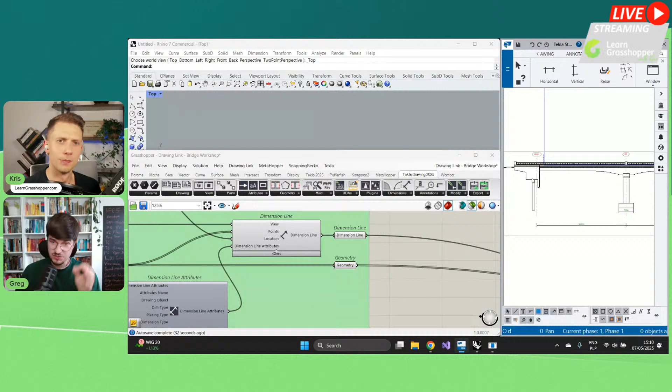As you can see, there are multiple different attributes, both in the live link and the drawing link. You can customize everything, but there is always the question, as Gabriel already raised. Probably it is always better to customize the visual appearance by the view settings and by the detailed object level settings. Those little tiny combinations of hidden lines, red, green, blue, whatever is your typical duty, should be done there.

But okay, now I would like to also insert the level marks. I will just try to place the level marks at the bottom of the pile. Those are also objects which can be done with the help of the drawing link, and as you can see, they are customizable. What is interesting here is that we see 6 piles probably, a lot of them in a line, but we want to place only one level mark because they all have the same bottom line.

So yeah, it's just the magic of the Grasshopper. This is why I always like to do something inside of Grasshopper, because you have those handy geometric components ready from the shelf, so it speeds up the process.

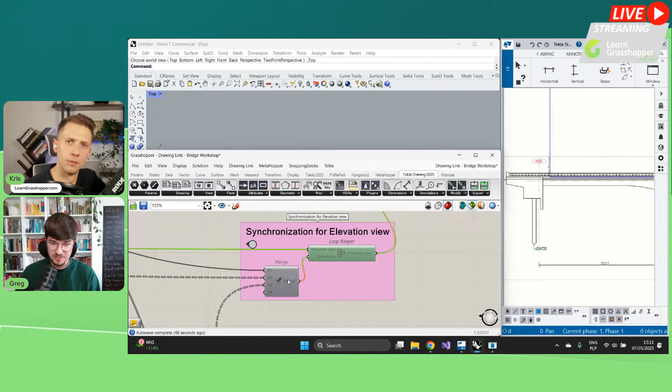When you deal with many different operations on the view, here I placed the dimension for the foundation, for the grid, for the piles. Then it's always nice to have them directing into one component. I developed at some time the loop keeper - it's just some type of data dam. It will wait until all of those previous workflows meet at that point, and only after that will it pass control to the next one.

That's quite important, because now, as you can see, that view is placed somewhere in the drawing space. It's not what we would like to have. So we want to have some control over the positioning of that view, and that part is done here.

So after completion of all of those insertions - the dimensions, level marks, all of that stuff - we are ready to place. Why is that important? Because only after insertion of those elements do you know exactly how big that view is, how much width and height of the drawing space it occupies. So you should always wait until everything is done on the view level.

And after that, let's go to the positioning. Here I am using the positioning like that - I will just enable that. So I'm asking the drawing, hey drawing, please tell me how big you are - so this is the A0. Based on that, I am able to create the anchor point, because I have to know where I want to place that view. I will use that component to place it at the upper left, so I'm providing the point, the anchor, which also reflects the margin for that particular layout.

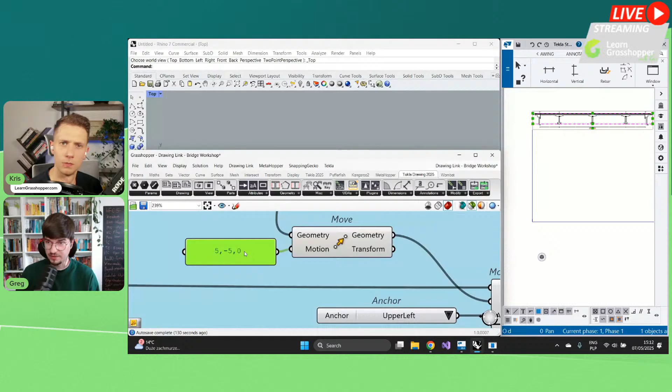Of course, it's very dependent on your company settings, how big margins you have and how you would like to set up the drawing. But then you are able to just say, okay, based on what point you want to make that positioning. For that, only this one makes sense, because I want to have that view in that corner. So that view is now positioned, and let's go.

I'm just watching the time for the next thing. This is the elevation view positioning, but we still don't have the top view. So then I want to create the second view, because I have the elevation view, and now it's time to think about the top view. The question is, what is different between those two?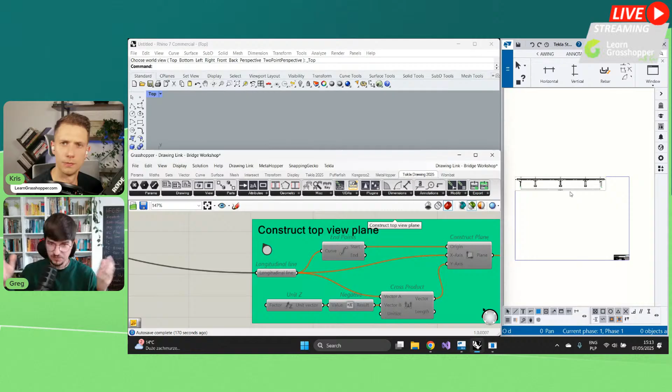We will use exactly the same bounding box, because we want to show all of those elements which the bridge contains, but the direction, the plane on which we are looking into our objects, is different. That's why I am creating a different plane here - this is just the top view plane, but not the global one, because we have that bridge aligned not by the global X, global Y, but some different road line.

So then I'm just getting the restriction box exactly the same as previously, but now, as you can see, we are looking from top, and if we compare with the previous one, there we were looking from the bottom, from the side. So that's the difference. And now, as previously, we will just insert the view. And as Kris said previously, it's very much the same as a normal Tekla user would do from the UI.

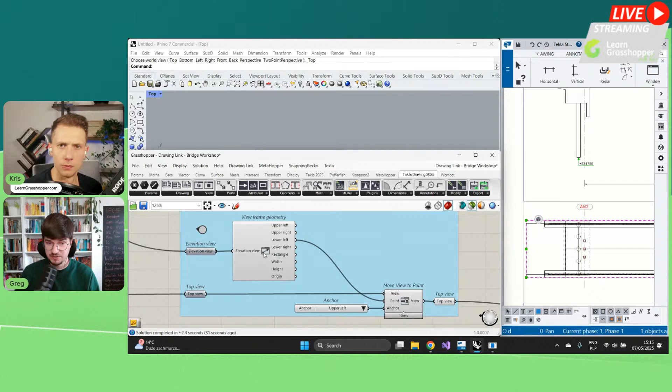So we have to have this 3D space limited to some area, and also provide the direction of that view. And then we are able to position it. And I want to have them glued by the edge. So I will use the previous elevation view to position the new one. So now they are just glued by that point, and it worked for that particular case. At any time you can ask which points of the view are located in which area.

So then, as Greg already mentioned, for the foundation view we will use exactly the same restriction box, but with different settings. So now I will use exactly the same model view here. So I'm looking at the same geometry from the same angle, but with different settings. So now I will use those settings instead of those ones, and you need to have them prepared previously. Usually you have some settings prepared by some magician in your company, or maybe you are that magician. Then it will be much easier. And let's just create that model view for the foundation.

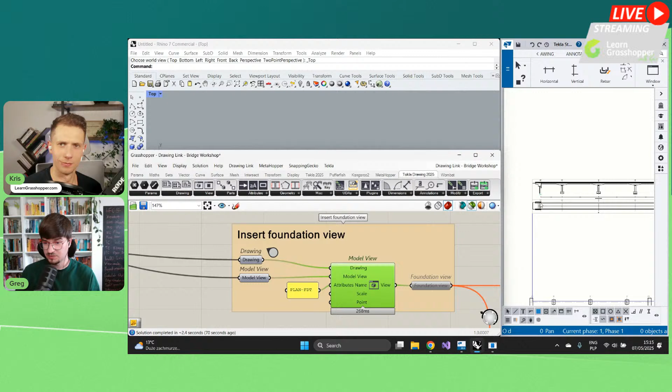And here it is. And what we can do with the foundation: probably we should place the dimensions for the foundation along the longitudinal axis and the perpendicular direction. So here are the dimensions, and as always, it is a little repetitive, I know, but you always start with some view and ask, okay, what is visible there? And you are limiting to the drawing object type you are looking for. If you want to create reinforcement dimensions, then you don't use the part, but the reinforcement. And as you see, there are quite a lot of different object types which can be placed inside your drawings.

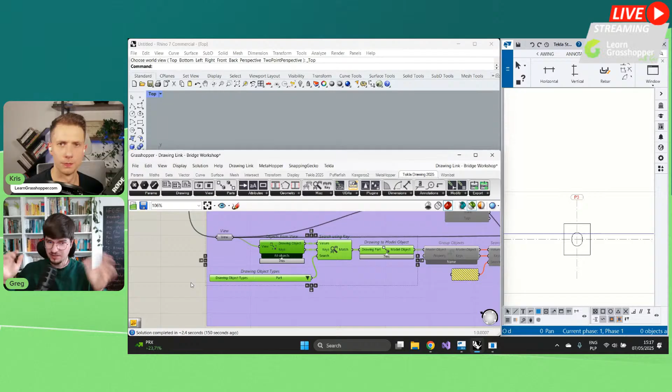Sorry to interrupt. I see the pattern that you are using similar components, and actually part of the script can just be copied here. You don't have to create every connection from scratch. Yes, exactly. That part is the perfect candidate for a cluster. That's something which is reused every time, because you always start with the view and then think, okay, what is visible there? Of course, there is an alternative approach, a little faster in terms of execution time, where you know that in that view you will see something. But for the sake of this webinar, I am not making strong assumptions. I'm always asking the view, hey, please tell me what is there.

So then I'm grouping by the name, and here the name will be a little different because I want to see only the foundation. And what other names are visible here? We had the abutment, foundation, pier, pile. Those objects are visible in that view, and truly they are. But I want to work only on those objects. So I am just limiting those elements to what I want, and then the same: convert to brep. Let's see that brep in that particular view. As you remember, we saw those foundations exactly here, but in that view we saw them from the side, and now we see them from top.

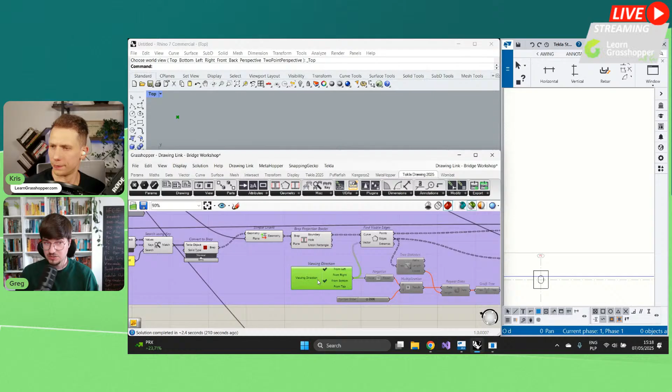Then let's get their borders, so casting the shadow, and then something goes a little differently because I want to have the dimensions from 2 sides, or maybe 3 sides, or maybe 4 sides. And what is now different? Now we enter the complexity of the trees inside Grasshopper. If you want to create those dimensions in one shot, you have to properly structure your points as a tree and the location as a tree. And to do it, as always, there are different ways, but this is, in my opinion, one of the easiest. You can also use the series, but maybe not in this case.

So I am doing some Grasshopper magic just to offset a little from the edges. And it's just steered by that. So now you see both in Tekla and in Rhino that I am just moving a little further or closer to the dimension edge. And based on that typical schema, you will be able to place the dimensions from whichever side you would like. And then there are multiple times when you want to have the dimension link.

Normally, as a user, you will just click here and link dimension line, and it will be there. But with the Drawing Link, you can do it also by that. So you have to provide a list of elements which should be glued, and that's all.

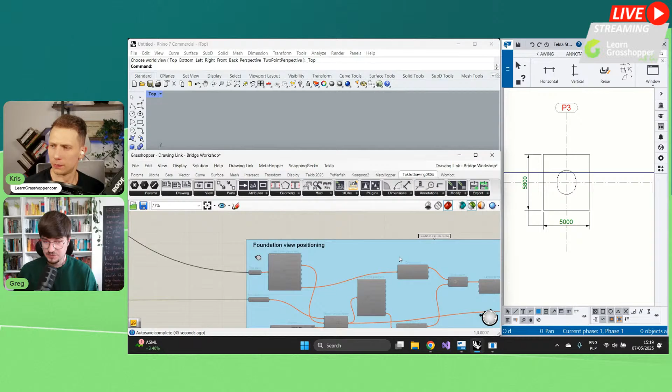And okay, I see that I'm very close to the end time, so let's look what is there. There is some synchronization as always, and then what is there? Okay, that view is then positioned, so that will be just a little different, because I will go to that part.

Okay, so now, as you can see, the previous way of positioning just to the edge between the top view and the foundation view is not the best, because those views are misfit. Their origin is not exactly at the same place. If you will see those red arrows, then you see that they are not perfectly aligned vertically.

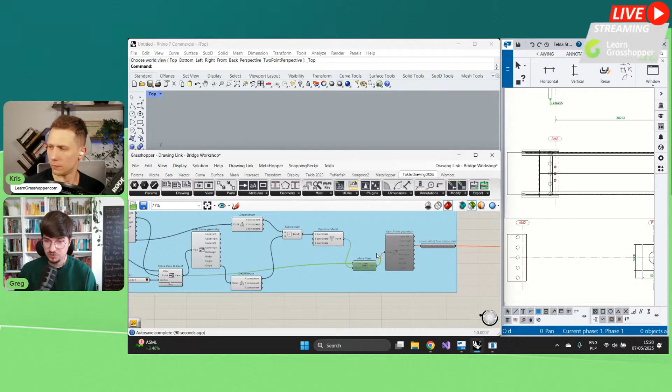So here you can do it by some different way of moving, by some vector. And if you are able to calculate that vector, then it will work. So now I will just move it, and now they are aligned how we would like to have them. So let's go further.

And then there is some section. So now I want to create the section, the mid-deck section. So I will just go that in a quick way. So now the drawing link created the section here, and it is placed here. And let's see how the section creation looks like.

Here we have to provide a little more points because it's about providing the point where the section line should start and where it should end. And how big of the model area has to be covered. So what is the depth up and down, and there are different things to set up, like the scale, name and all of that which is coming from the section.

And I think that there is also one thing quite interesting, the deck dimensions, because we saw in Sebastian's presentation that he started with the section of the bridge in 2D, and then he extruded it through the path with some sections. But here, as you can see, the workflow is exactly the same.

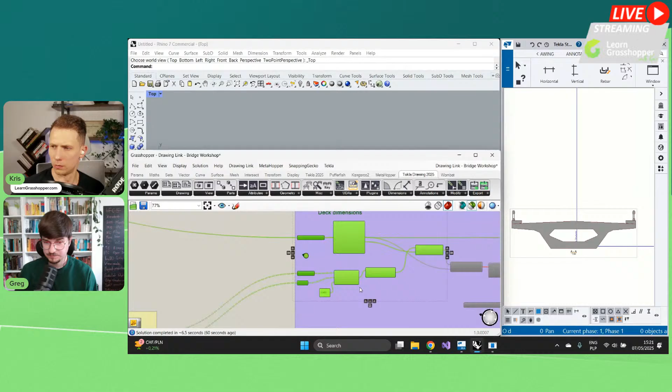So I will ask the section, okay, please tell me what is visible. Please give me just the parts. I will group them by the name because for that model, the names are quite unique. And then, okay, I want to see only that part which name is deck, because here we have some parapets, we have some railings, but I want to create the dimension only for things which are named deck.

And here the difference. The naming is really important for all the elements, because when people are doing drawings, they just see, oh, I know that this is the deck. I don't have to check the internal name inside of Tekla. I just see this is the deck. That's all. But for the machine, it's not working like that. You have to guide it and instruct it in some way, like the classes, UDAs, names. Those are the typical ones.

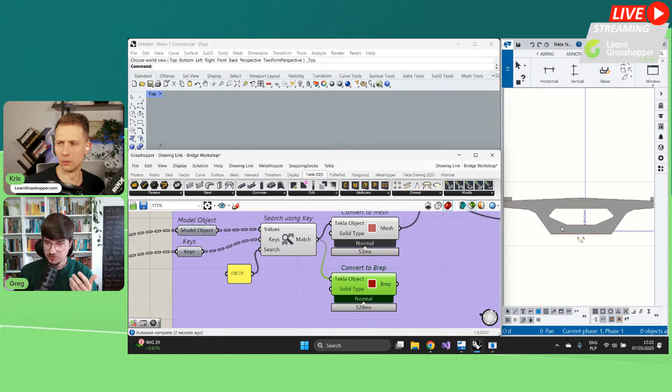And now, I think, one last thing which is worth to mention, because usually when you deal with Tekla geometries, you are using just convert to brep, but here it all depends on the meshing properties of those elements where they were created as an item. It is configurable on the Tekla side or in the bridge creator, but just please compare the times which are needed to convert to the brep. It's almost half of the second, and convert to mesh.

So if you face some bottlenecks in terms of the time, then maybe just look if the convert to brep is the source of your problems. If that, then you have to do it with the convert to mesh. And then it goes almost the same. I'm also using the mesh intersection, and I know that I'm a little after the time, but just one last thing.

Please look what we see. Okay, so this is the result, and what I had. I had the whole mesh of that particular deck segment, and I also knew, okay, this is my window, this is my slice of the section which is visible, this one.

So I don't want to work on the whole deck section, because if it is curved, if the geometry is not just a simple extrusion like here, then I will get too many points when I just get the projection. So with the help of the Rhino geometry engine, you can always ask about the intersection between the whole geometry coming from Tekla and that very slice of the view.

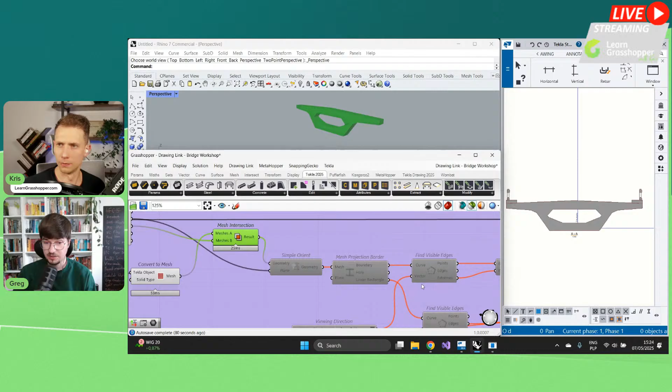Okay, and then I will just move it to create that, and then you will see in Tekla that I am getting those dimensions from the bottom, because that's what I saw. Okay, maybe from top, and now those dimensions are from the top.

And next, maybe last tip: when you deal with placing multiple dimensions into the same direction, like here I want to place the dimensions for all the points which break the polyline, but also I want to place the overall dimension, then the series component is very handy, because here you can provide the first margin, I would say, the first distance, but also then between the rest of them. So if you have stacked dimensions, a lot of them for some assembly drawing or cast unit, then the series works very well.

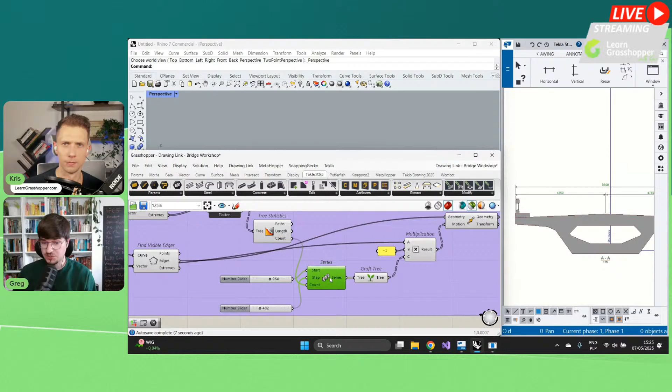And yeah, I think that we are a little over the time, so that's good. But you showed a lot, and of course we are going to share, so you can try it yourself. First, you can generate with Grasshopper what Sebastian prepared and then use the script. Are you going to enable all the components? Yes. Hope that nothing will crash. So we'll see all the magic. So you can see all the moving stuff.

So yeah, as you can see, the workflow requires some time to create the script. But if you are doing these bridges over and over again, and you are repeating that, you will see that you can save a lot of time.